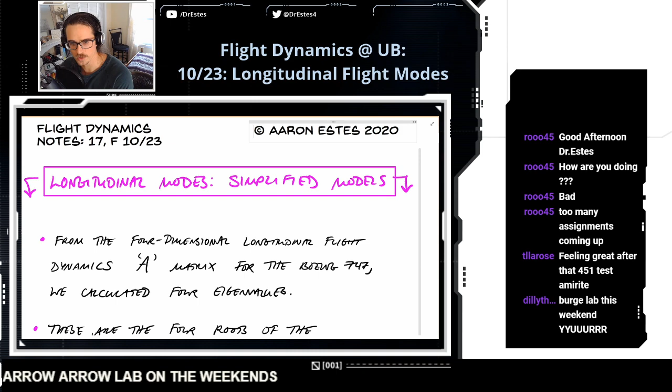Feeling great after that 451 test, am I right? Burge Lab this weekend. You guys do the Aero Lab on the weekends? What are you doing in the Aero Lab? Got some wind tunnel stuff going on, or the 339 lab is huge. Silent H, right?

Burge ruined the weekend. He pulled a weather hold with that Aero Lab. What does it mean to pull a weather hold? Everyone procrastinated.

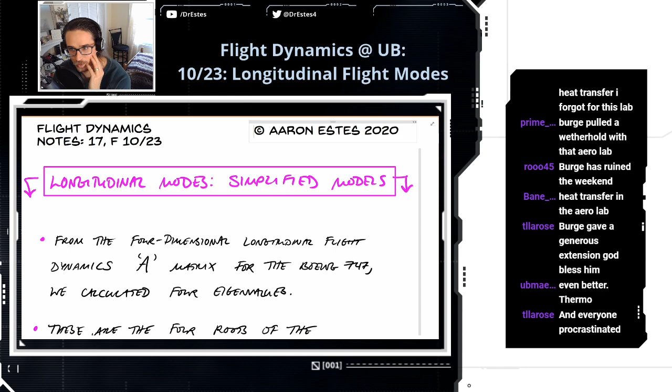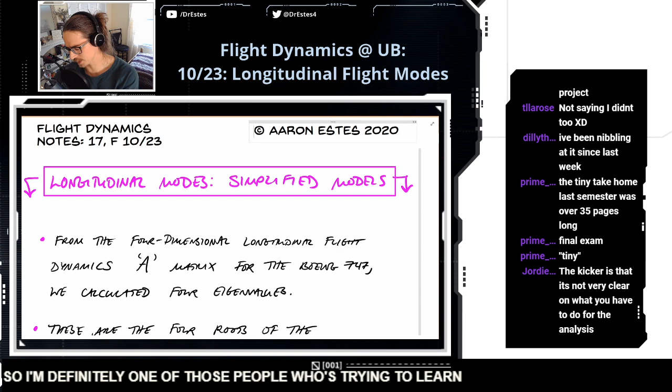He did not. This thing has been due for almost a month. Yeah, you know, that's the thing. Procrastination, I feel like some people are naturally good at taking care of things as they come up. I have to work very hard not to procrastinate, so I'm definitely one of those people trying to learn not to procrastinate. But I feel you guys. Man, time management is tough, I feel like it's a lifelong thing.

COVID sync and non-sync work has been illuminating, immense value. Wait, what do you mean by that? Expand—are you saying that synchronous stuff has been more beneficial for you? Mega Mike, it's a hard skill to hone in on. Yeah, time management, that's no small thing.

The option to be non-sync forces you to plan. Oh, I see. Like if it's non-synchronous, there's less structure and you have to make your own structure.

I miss just walking around campus going to class. I miss that too. I miss seeing you guys in the hallway or in the classroom or whatever. I miss being on campus, seeing people.

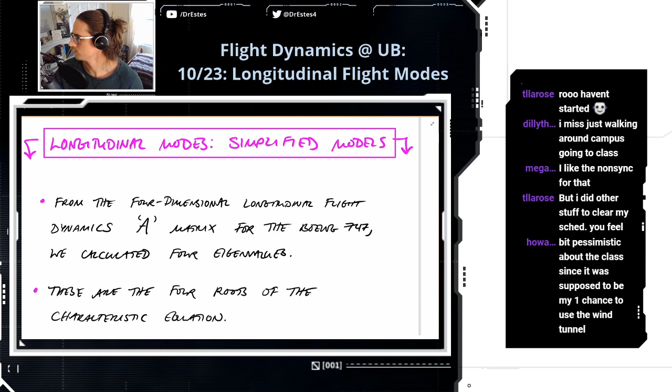It was supposed to be your one chance to use the wind tunnel. Oh, you're not using the wind tunnel for the Aero Lab? Thanks, COVID. Oh, that's a pain. Yeah, you don't get to do the lab in person, so you watch. Yeah. Oh man, I know.

I get the feeling that the season is changing without me noticing since I'm inside most of the time. Yeah, I try to get outside a little bit every day. It makes a big difference for me to just walk, see some leaves and stuff. Today feels like summer. It kind of does. It's bright outside.

All the classes are online in the spring. I know. Yeah, it's kind of a bummer.

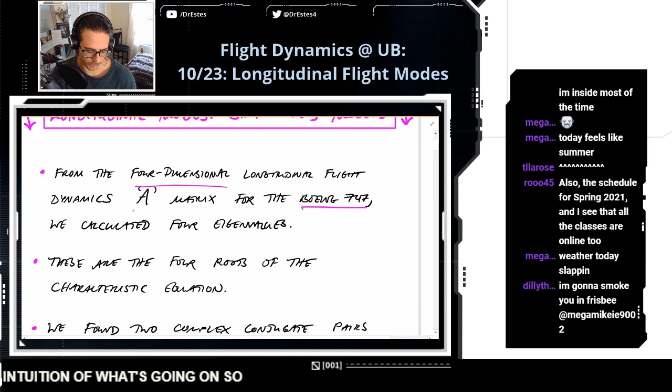We built a state space model, and part of a state space model is the A matrix. If you calculate the eigenvalues, we know from system dynamics that those eigenvalues are the roots of the characteristic equation for the system. The characteristic equation tells you a lot about the system dynamics: stability, whether there are oscillations, how quick the system is, its settling time, and also overshoot, rise time, and other transient characteristics.

So the type of roots we found for the Boeing—well, number one, they were stable. Thank God, right? How do you know if roots are stable? You look at the real part and just make sure that the real part is negative.

So these were the Boeing 747 roots—these two pairs—and these have special designations. This one is the phugoid mode, and this one is the short period mode.

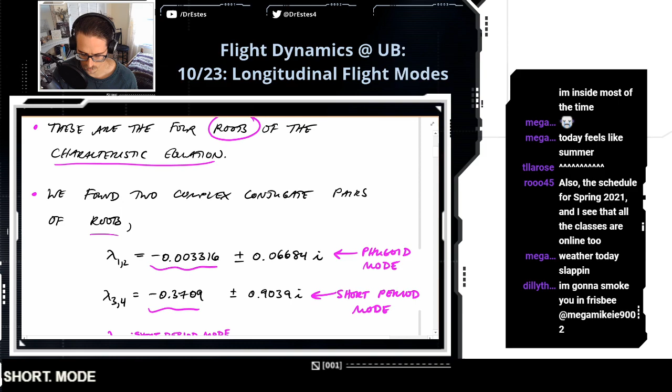And we're going to talk a little bit about physically what these modes look like today. I drew some fancy pictures, so we'll get to those.

If you draw these roots in the complex plane, you'll see the short period mode is over here to the left. We pointed out that means faster settling time. If you excite the short period mode dynamics, they decay very quickly. For the Boeing 747, it's on the order of 10 seconds.

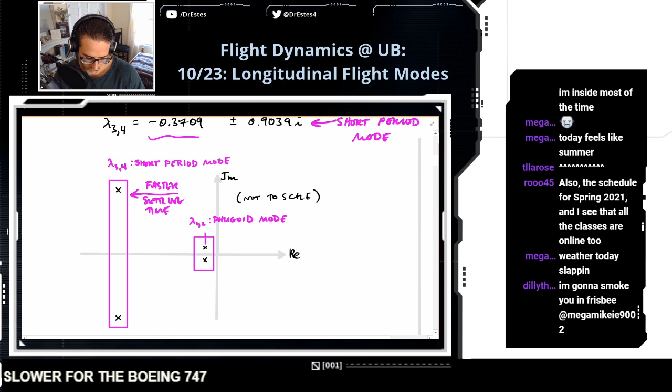These phugoid modes are slower. For the Boeing 747, this is not as far to the left. It means these dynamics are slower to decay. It takes around 1,200 seconds.

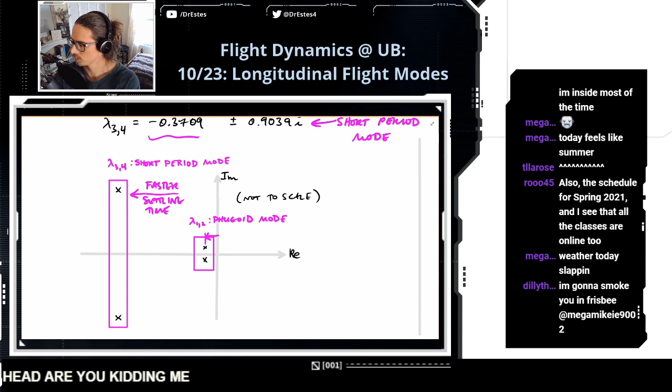What is that in minutes? I can't do that in my head. Are you kidding me? 20 minutes? 1,200 divided by 60? It takes 20 minutes. If you hit a gust of wind or something and there's no corrective action from the controller, 20 minutes for the phugoid mode to decay.

Now, the height of, or the distance from the roots to the real axis, which I'm just calling like a height in the complex plane, this is related to the damped natural frequency, omega D. And that tells you the period of oscillation. So the larger the distance from the real axis, the higher the frequency is.

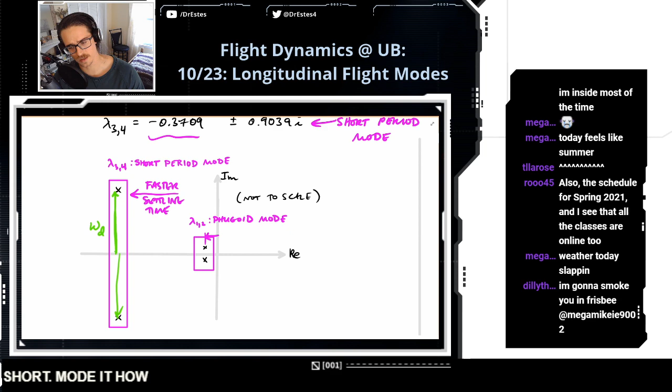So the short period mode has an oscillation period of like 7 or 8 seconds to complete a cycle. The phugoid mode, I think it takes about close to 100 seconds to complete a cycle, because it's much closer to that real axis.

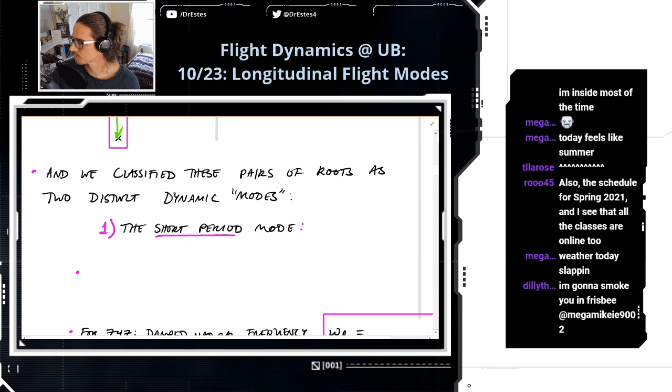Let's break this down a little bit more. So like I said, relatively short period of oscillation, with a fast settling time.

Let's just fill in some of these numbers here. So for the short period, for the 747, the damped natural frequency is 0.9 radians per second. To get the period of oscillation, you take 2 pi, divide it by that damped natural frequency, and we get about 7 seconds. Then the settling time, the time it takes for these dynamics to decay, we have an approximation for that, which is 4 divided by the product of the damping ratio and the natural frequency, and that's about 10 seconds.

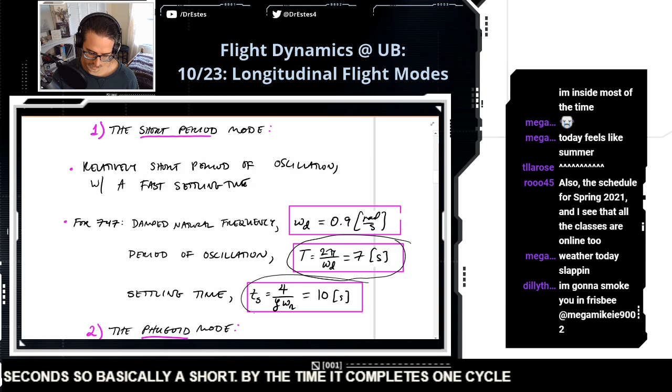So basically for a short period, by the time it completes one cycle, the dynamics have already decayed, so you won't expect this to endure more than one cycle.

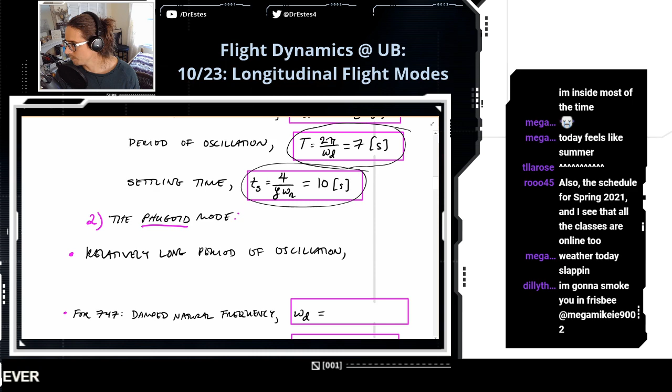Let's talk about the phugoid mode, and then we're going to draw some pictures. All right, the phugoid mode: relatively long period of oscillation. Everything's relative, man. With a long settling time.

Let's compare these for the Boeing 747. So the damped natural frequency is 0.07 radians per second approximately. Then to get the period of oscillation, the time it takes to complete one cycle, 2 pi divided by omega D, and it's like 94 seconds. The settling time, we'll use that same formula from above, it's about 1206 seconds.

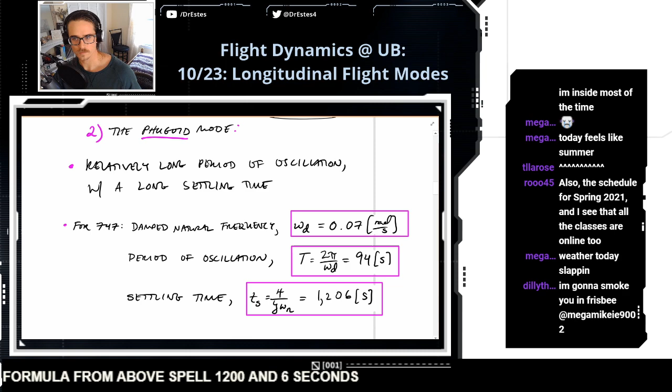All right, we've been talking about the period of oscillation, how long it takes to decay, but what does this actually look like? What is zeta again? Okay, so zeta is called the damping ratio.

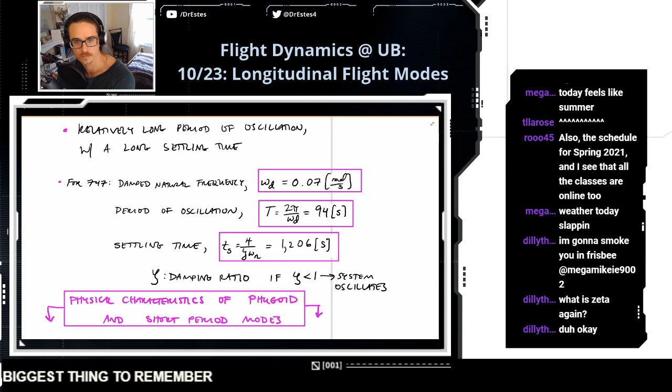Called the damping ratio. Now, something to remember: if zeta is less than 1, the system oscillates. I think that's the biggest thing to remember. You're going to have complex conjugate roots. So we already know, because these roots were both complex conjugate, the damping ratio should be less than 1.

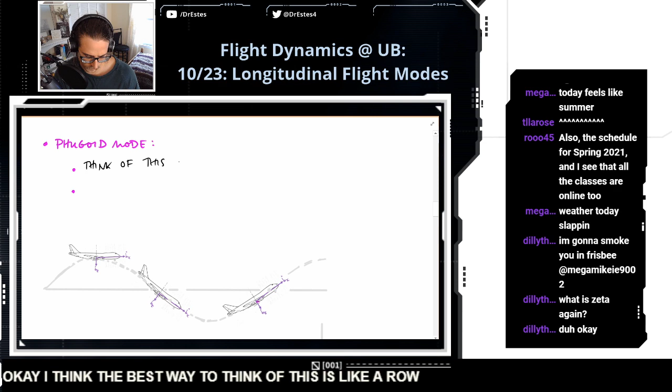I think the best way to think of this is like a roller coaster, because there's an exchange of kinetic and potential energy, just like there would be on a roller coaster that's following a sinusoidal path like this. So the aircraft follows a slowly decaying sinusoid - in the case of the 747, it takes 1200 seconds, 20 minutes, for this sinusoid to decay.

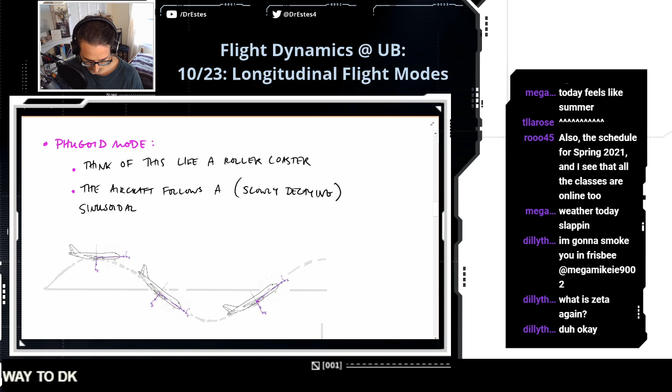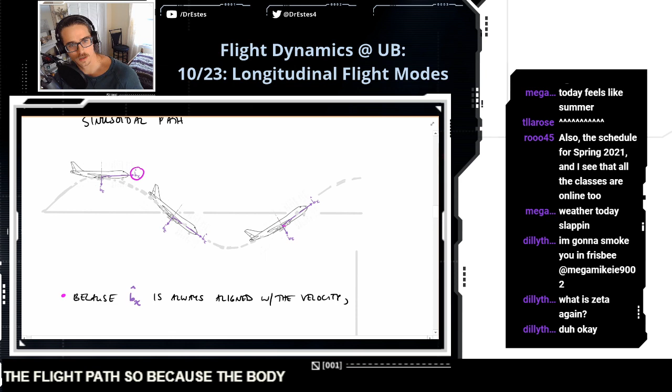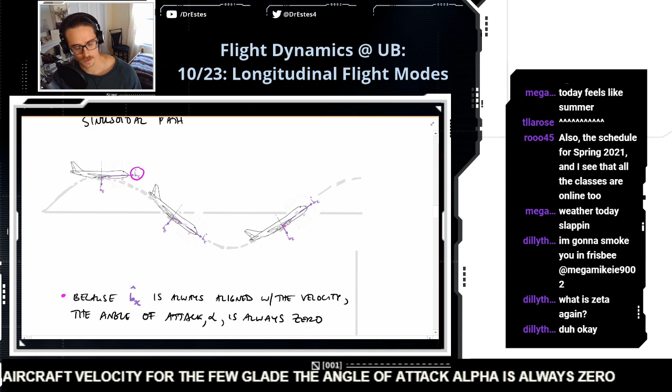Now if you look here, the longitudinal axis of the aircraft is always tangential to the flight path. Because the body X basis vector is always aligned with the aircraft velocity, for the phugoid, the angle of attack alpha is always 0. The relative wind generated by our motion is always directed along the longitudinal direction.

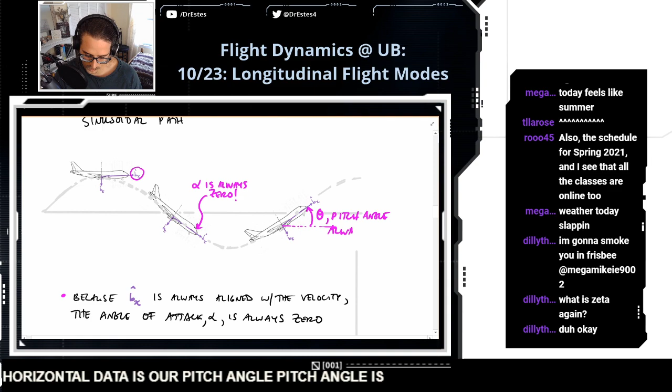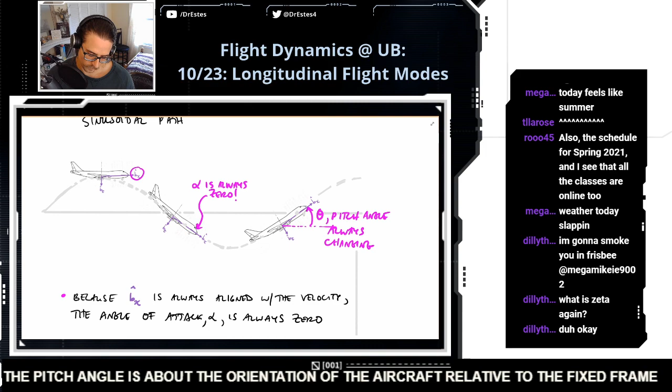The pitch angle is the angle of the nose relative to the horizontal. Theta is our pitch angle, and it's always changing. Remember, the pitch angle and the angle of attack mean different things. The angle of attack tells the angle of the relative wind, so it has to do with velocity. But the pitch angle is about the orientation of the aircraft relative to the fixed frame. That's why this pitch angle right here is non-zero.

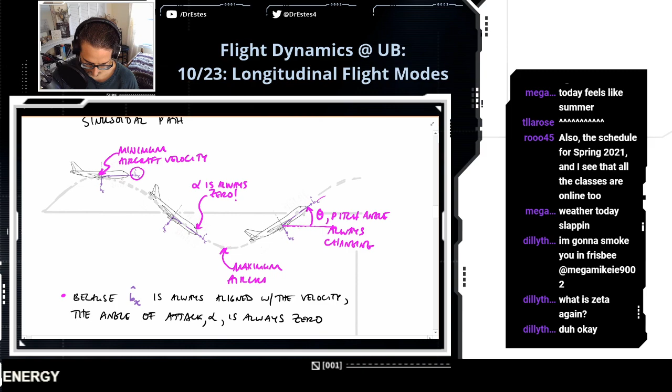Okay, the cool roller coaster effect of the phugoid is at the top. You're going to have minimum aircraft velocity. It's definitely non-zero, we're moving like 700 feet per second, but it's going to deviate slightly from that nominal flight speed. So maybe at the top here it's like 650 feet per second. Then it gains speed as it goes down, as it gains kinetic energy, and then it loses speed as it approaches that crest again, going back to a minimum velocity. I like this because it's a pretty rich way of looking at this mode - you can kind of visualize what's going on. It's like a roller coaster.

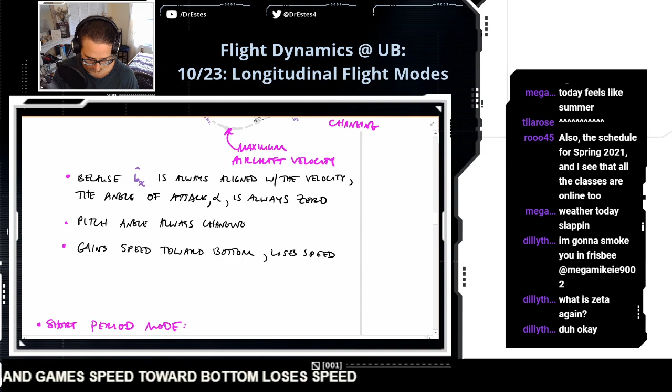So pitch angle is changing, and it gains speed toward the bottom, loses speed toward the top. Let's just say it this way: as you're ascending, you're going to lose some speed. Gain speed descending, lose speed ascending.

And the period is the time it takes to get back to the same place within the cycle. So this distance from here to here, or the length of time, that's the period, which is basically like 100 seconds. So it takes a little over a minute for a Boeing to complete this cycle.

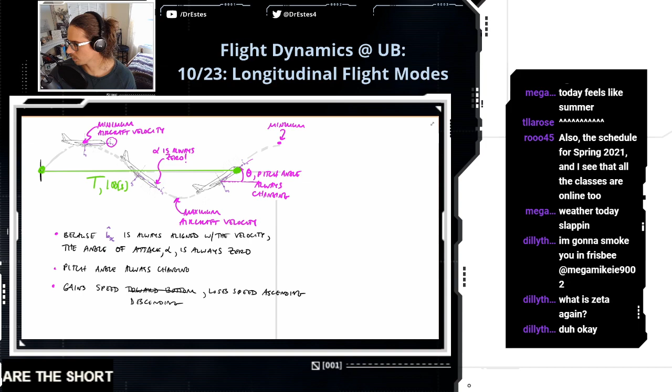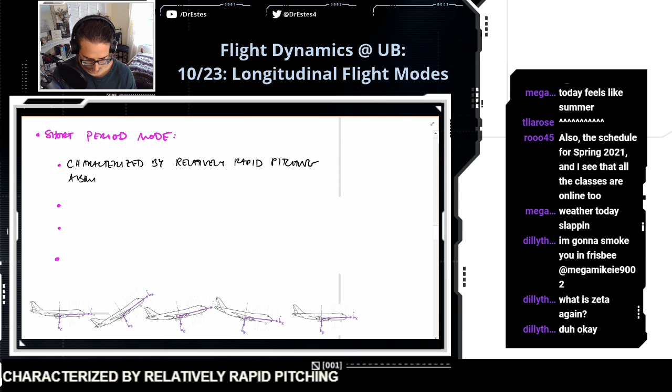All right, let's talk about the short period mode. This one's different. Let's get this picture in here. Okay, so this is characterized by relatively rapid pitching about the CG. That means going nose up, nose down - that's a pitching motion.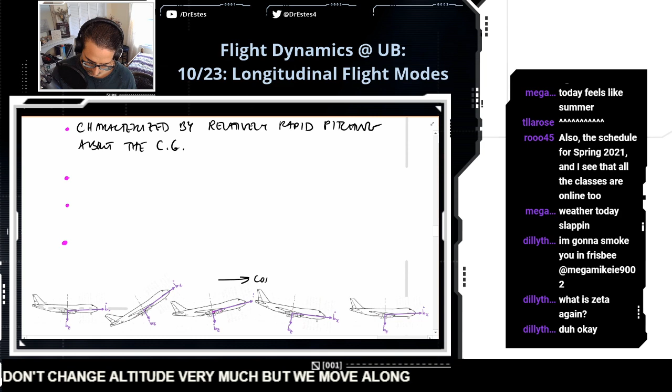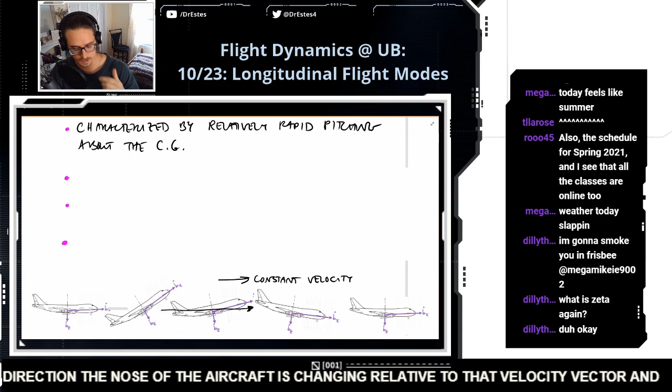So you see the nose - let's say we're flying straight and there's a gust of wind that tips up the nose in an exaggerated fashion. Well, that'll excite this short period mode where we don't change altitude very much, but we move along at constant velocity, and the nose of the aircraft is just pitching up and down as we move in that direction. Because this constant velocity is just along this straight line direction, the nose of the aircraft is changing relative to that velocity vector. And so if the velocity is always going that way, we do have an angle of attack.

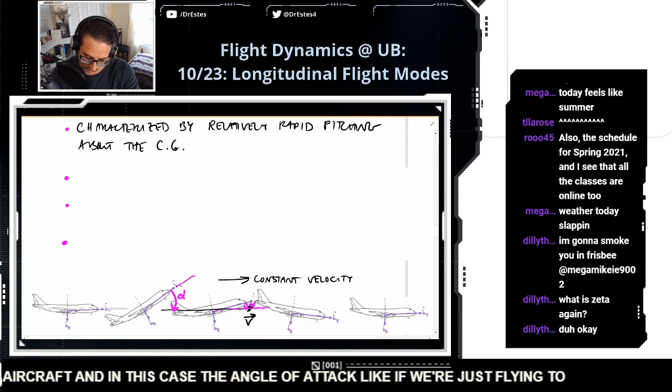That's changing, because it's the angle between the relative velocity and the nose of the aircraft. And in this case, if we're just flying totally horizontally, the angle of attack would be equal to the pitch angle, because it just happens that the velocity vector is aligned with a fixed axis basis vector as well.

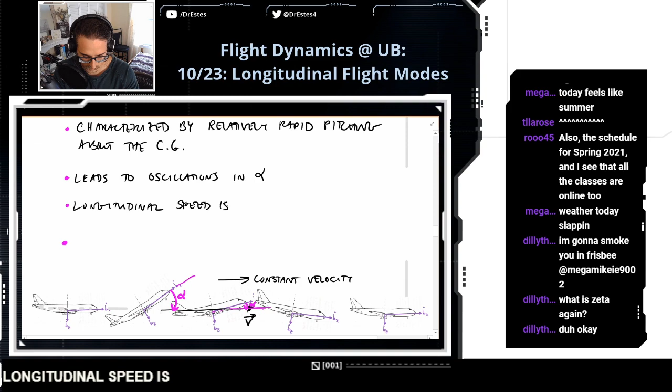So this leads to oscillations in alpha, the angle of attack. Unlike the phugoid, longitudinal speed is constant. The phugoid, it's kind of changing - it gets slower at the top, faster at the bottom. And another important feature is that the motion quickly damps out.

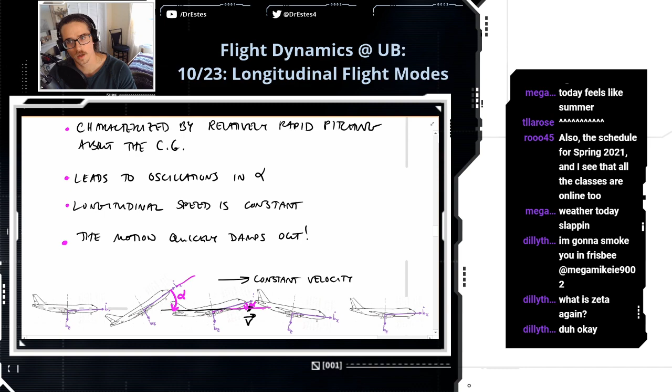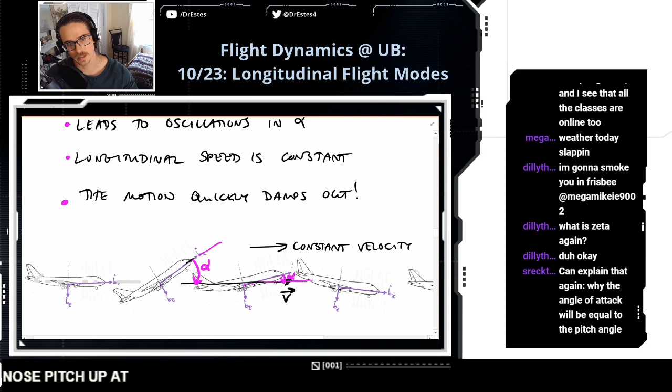Remember, the settling time is around 10 seconds, and the period of oscillation is around 7 seconds. So one cycle of motion would be like the nose pitches up, and then to complete a cycle the nose pitches up once again. But look at this - the motion is damping out, and the angle of attack is becoming less and less. So all of that motion damps out after about one cycle. The nose might pitch up, and then you won't really see much after that again. It's not like it's going to keep going back and forth and back and forth.

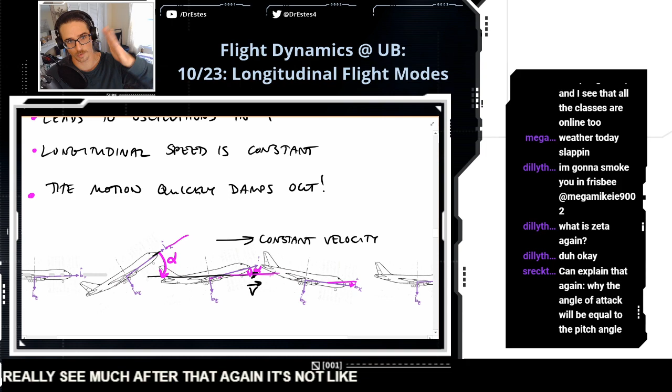Okay, so that's kind of what they look like. So now we can visualize.

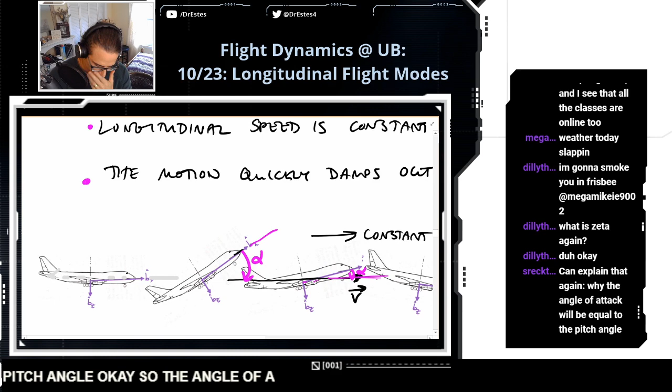Can you explain that again, why the angle of attack will be equal to the pitch angle? Okay, so the angle of attack is the angle between the nose of the aircraft - this bx basis vector - and the relative wind. So if my velocity is going just straight horizontally, then the relative wind is hitting the aircraft like this. So the angle between the nose and the relative wind, that's alpha, okay?

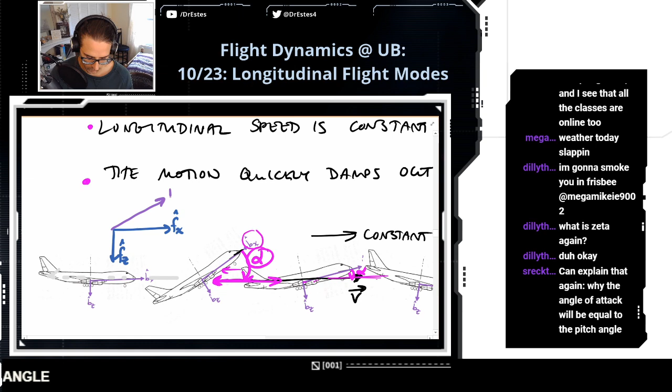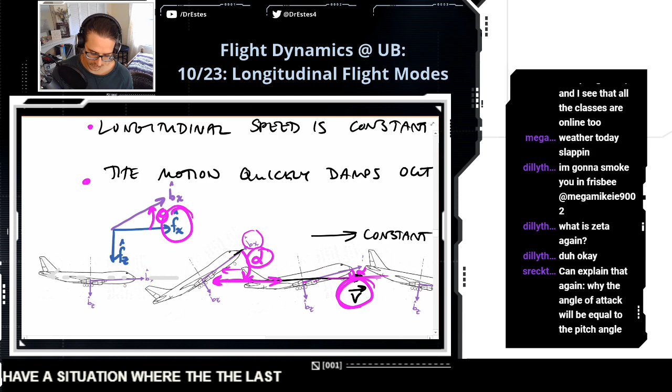Now, what is the pitch angle? It depends on the definition of the fixed frame, but usually we'll have fx horizontal, fz going down, and the pitch angle is the angle between the nose of the aircraft and that fixed frame basis vector. So if the velocity and this fixed basis vector are aligned, then the angle of attack and the pitch angle are the same.

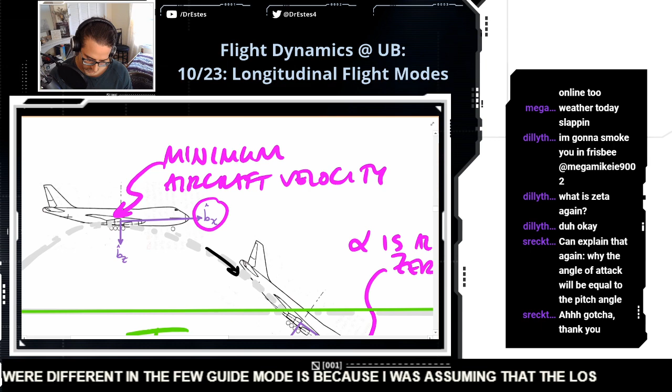The reason they were different in the phugoid mode is because I was assuming that the velocity is always changing to follow tangential to this path. So in this case, the angle of attack is 0, but the pitch angle, if we still assume that basis vector for the fixed frame is aligned like this, is different.

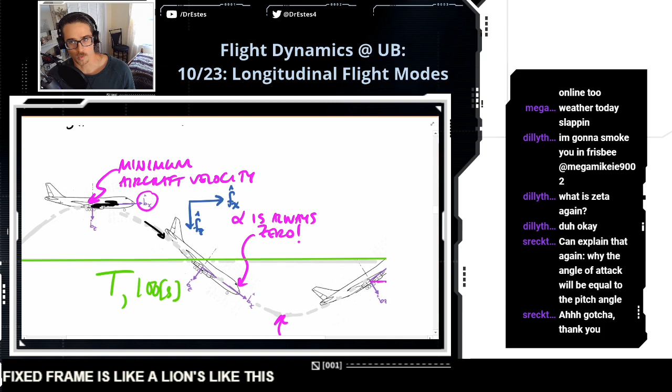You're welcome, my friend. Okay.

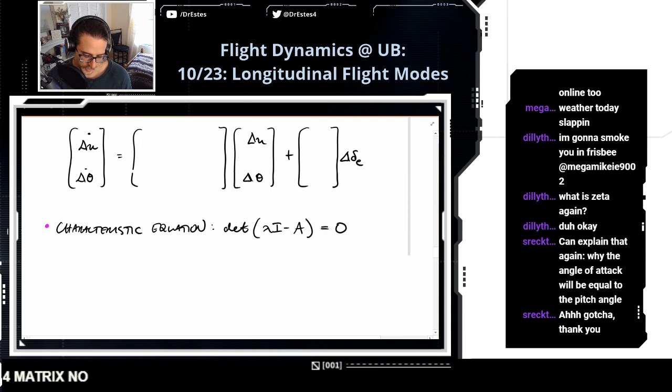All right, we're going to do some simplified models. The way we derived the settling time, the natural frequency, whatever, is we took the eigenvalues of the A matrix, and that was a 4x4 matrix. Now, it turns out you can make a second order model for the phugoid and the short period that captures those same dynamics pretty well, and it's easier to work with than a fourth order model. So I want to show you these things.

So for the phugoid mode, let's start with that. You can make a new set of dynamics. Now that we've visualized the phugoid mode, we know it's characterized by changes in speed - it's slowest at the top, fastest at the bottom. So the speed is changing and the pitch angle is changing. So you can make a truncated model that focuses in on these variables.

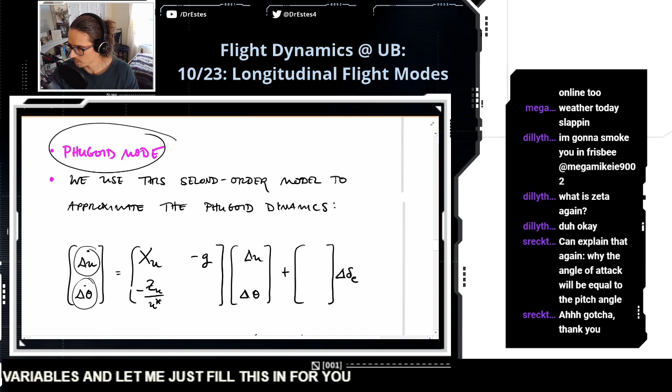Let me just fill this in for you. This is our new A matrix for the phugoid. It also has a B matrix, which we won't really use today - we're just going to focus on the A matrix. But for the sake of being complete, we'll put this in here.

So what I want to do is use this simplified model and see if it predicts the same behavior that we know a Boeing 747 should have. And spoiler, this does a pretty good job - this is why we use this simplified model. And we're going to calculate the characteristic equation by hand.

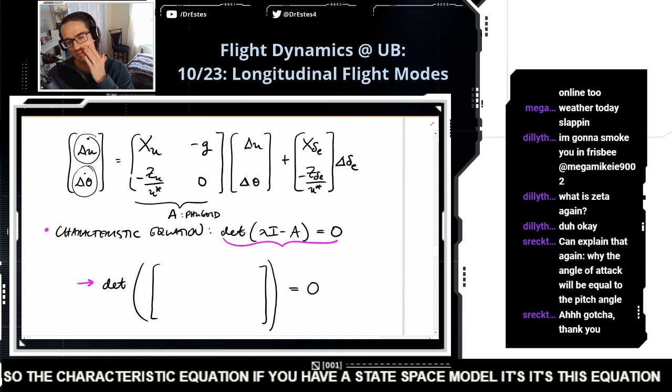So the characteristic equation, if you have a state space model, it's this equation: the determinant of lambda times an identity matrix minus your system matrix. So if I substitute this in, I'm going to have lambda minus xu, because I'm subtracting the A matrix. And this top right element, minus g, if I subtract it, it's positive g. This is going to be positive zu over my nominal velocity. And I'm just subtracting 0 here, so I'll leave lambda in the bottom right.

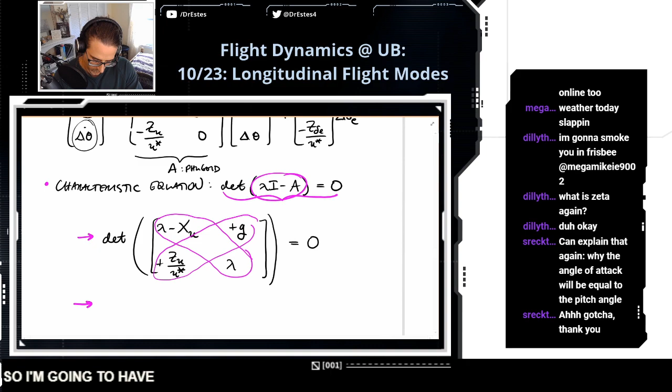So if I take the determinant of this matrix, which is really easy to do, that's our characteristic equation. Just a reminder, the determinant is the product of this diagonal, and then you subtract the product of the other diagonal. So I'm going to have lambda squared minus xu lambda, minus the product of that other diagonal, equals 0.

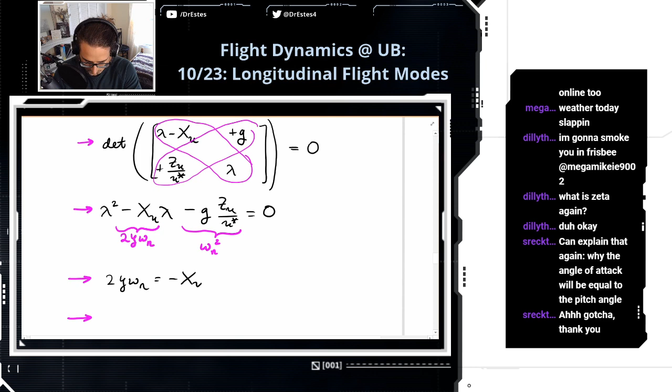Now this is in a nice second order form where you might remember this from a dynamic systems class. This coefficient is equal to 2 times the damping ratio times the natural frequency. This coefficient is equal to the natural frequency squared. So I have this relationship, and I have this relationship.

All right, so that's pretty painless. Now I want to use these equations to compare results to the full model here. All right, let's do this.

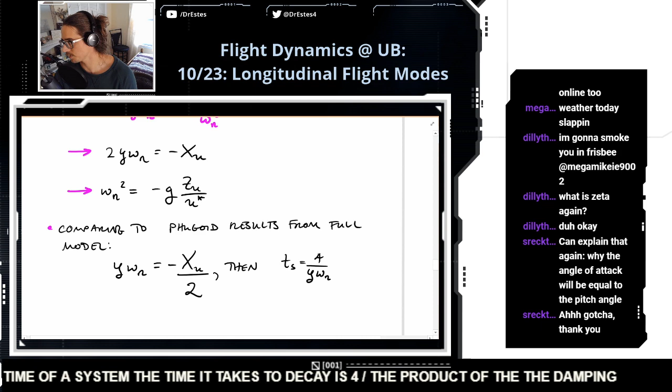So using this zeta omega n equation, that's equal to minus x sub u, the stability derivative, divided by 2 - I'm just getting that from the equation above. And then I have a formula for the settling time: the settling time of a system, the time it takes to decay, is 4 over the product of the damping ratio and the natural frequency. So if I substitute in this expression, I'm going to have the settling time is minus 8 over the xu stability derivative.

And this stability derivative, we got it from a table in a textbook for the Boeing 747. So fortunately, for a lot of well-known aircraft, you can just look up these stability derivatives in a table. So let's get the settling time. That stability derivative was minus 0.006868 seconds to the minus 1. And this is going to evaluate to 1,165 seconds.

And this is compared to the 1,206 seconds that we estimated from the full model. So there's a little bit of error incurred there, but not too bad.

All right, let's continue here. So I have the natural frequency. If I use the expression up above, it's minus the gravitational acceleration times z sub u over my nominal velocity. So let's plug this stuff in.

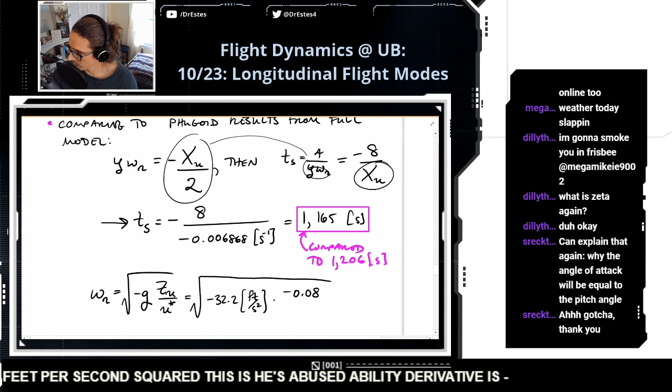So gravitational acceleration minus 32.2 feet per second squared. This z sub u stability derivative is minus 0.08993 seconds to the minus 1. And then our nominal velocity was 774 feet per second, which I believe was like Mach 0.8 at 40,000 feet. So pretty close to the speed of sound.

Okay, if you calculate all this out, this predicts a natural frequency of the phugoid mode of 0.06 radians per second.

Now, to get the period of oscillation, so that's what I want to compare to. I know it should be around 100 seconds or so. I have to take 2 pi over the damped natural frequency, which is different than the natural frequency. It's not that much different. The relationship is the damped natural frequency is the natural frequency times the square root of 1 minus the damping ratio squared.

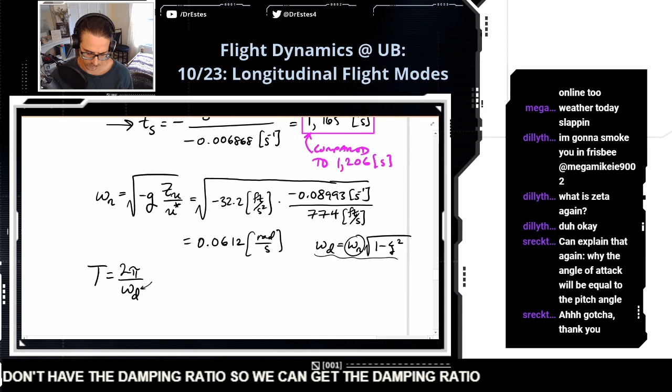So I need to calculate this so that I can substitute it in there. So I have the natural frequency, but I don't have the damping ratio. So we can get the damping ratio though. If we look up above, well, I know it would be minus x sub u over 2 omega n. And now I have this and I have this, so it's no problemo whatsoever.

0.0561. Now, if I substitute that into the damped natural frequency, I get 0.0611 radians per second, which, I mean, it's a negligible difference between the natural frequency.

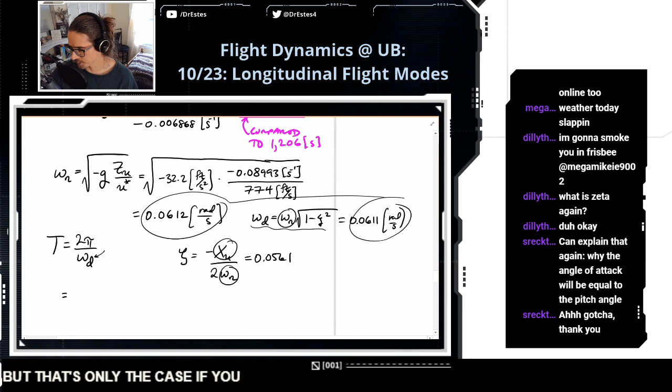But that's only the case if you have a small damping ratio. Okay, so now we can get the period of oscillation, and it's 102.83 seconds. And this is compared to the 94 seconds that we predicted before. So it's a little bit off.

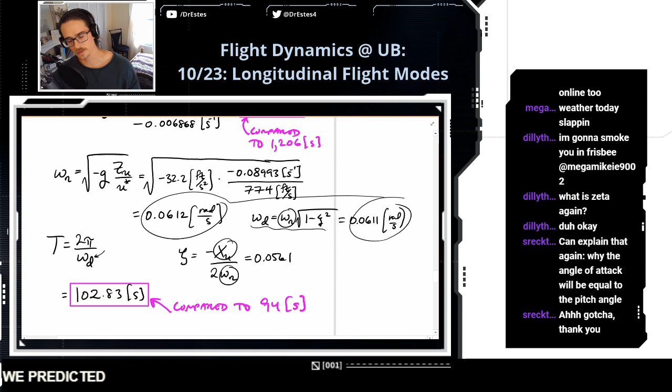Okay, so a question you might ask yourself is, okay great, this simplified model gives relatively the same answer, there's a little bit of error. But what's really the advantage of using this simplified model? Like, is it a big deal to go from a fourth order model to a second order model? Like, can we not handle that?

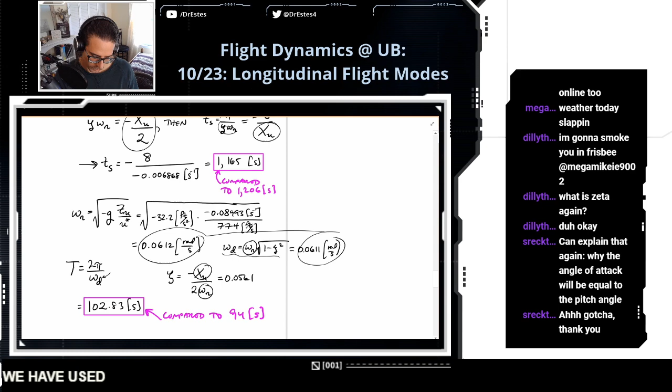I think the important reason is that, using this simplified model, we have analytical expressions for natural frequency, for damping ratio, and it's connected back to physical quantities like the stability derivatives and the airspeed. So when we calculated the numbers before, we would not have had such a tidy expression for natural frequency and so on.

So using these equations, you could say, all right, I want to adjust the period of oscillation of my phugoid mode for whatever reason. Like maybe the settling time takes way too long, and I want to bring this down to like 900 seconds. Well, using this formula, you could say, okay, the settling time is basically related to this stability derivative, x sub u. And if I want to decrease my settling time, well, I have to make x sub u bigger.

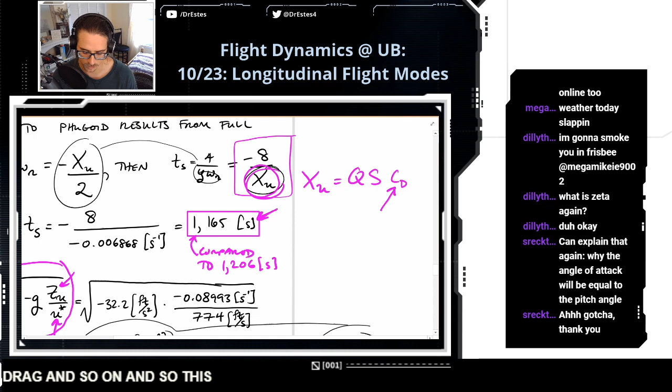And in a previous lecture, we calculated another expression for x sub u. I can't remember it off the top of my head, but it was something like the dynamic pressure, planform area, and then it was related to the coefficient of drag and so on. And so this comes back to maybe I need to change the area of the wing in some way, or maybe I need to change my airfoil so that this coefficient of drag changes.

So what I'm trying to say is these simpler equations give you some kind of basic intuition of how do I actually need to play with the geometry of the aircraft to achieve some performance characteristic, like minimizing the settling time. So it's pretty cool.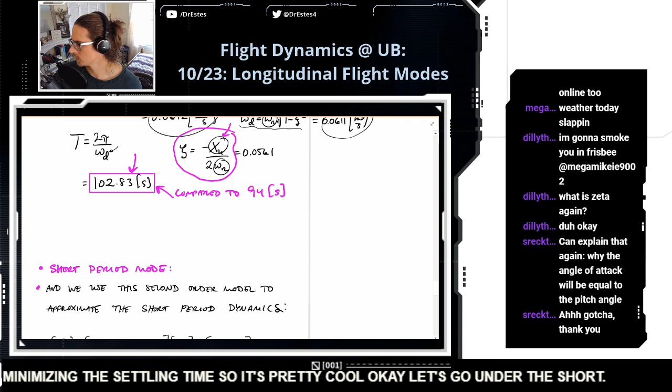Okay, let's go on to the short period mode. We'll do this approximation, and I think we're going to wrap up right around 350. We're doing good on time today.

Okay, so this is the second order model for the short period mode. This one, notice the parameters over here.

Number one, we got the pitch rate. So Q is your pitch rate. And we know like this mode, it's kind of sending the nose up and down, so it's important that the pitch rate is in here.

This is the speed, the velocity, and it's the time derivative of the velocity component relative to the BZ vector going out the bottom of the aircraft. But think of this as related to the angle of attack.

So it's basically describing, because we know that for this maneuver our speed is held constant, the angle of attack is the inverse tangent of delta W over U. So from this, we could calculate the angle of attack.

Let's fill this in. So I got Z sub W in the top left element. I got the airspeed in the top right. And then I have these stability derivatives for the pitch rate. And I'm running out of room for this element.

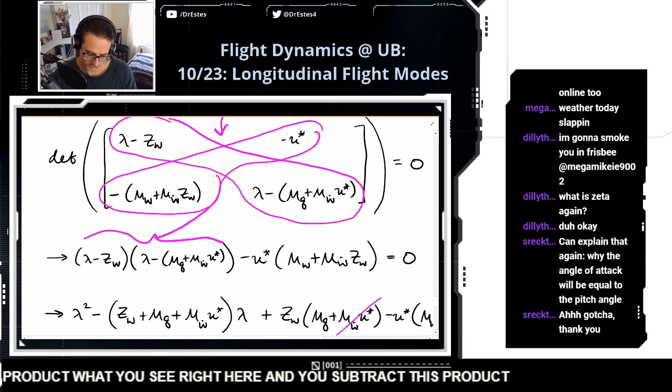So that's what we have right here. And then we just simplify it a little bit. For one thing, you'll notice that these two terms are going to cancel out, considering these products on the outside as well. And you end up with this, where this coefficient in front of lambda, that's 2 times the damping ratio times the natural frequency. This is the natural frequency squared.

And so what I want to do, I want to use these expressions and let's see how some of the numbers compare to the full model. So let's start with the natural frequency this time. Natural frequency squared, it's going to be Z sub W, and I have a number for that.

Minus 0.313 seconds to the minus 1, multiplied with M sub Q, minus 0.339 seconds to the minus 1. And then I have minus M sub W, minus 0.0011 foot to the minus 1 times second to the minus 1. And then that's multiplied with the nominal airspeed, 774 feet per second, which is Mach 0.8 at 40,000 feet, I believe.

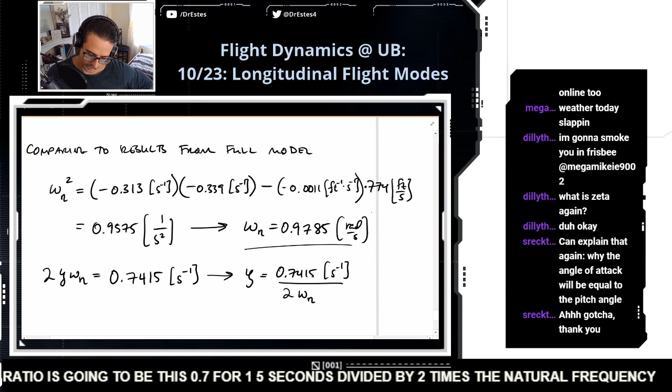So now I can get the damping ratio, because I know that the damping ratio is going to be this 0.7415 seconds to the minus 1 divided by 2 times the natural frequency. And I have the natural frequency right up here, so I can sub that in, and you're going to get a damping ratio of 0.3789.

Now this short period mode is much more damped than the phugoid. I think for the phugoid our damping ratio was like 0.05 or something. This is much more damping, which we expect.

So now that we have the natural frequency and damping ratio, we can get the settling time. It's 4 over your damping ratio times your natural frequency. So we have the natural frequency, we have the damping ratio. If you multiply this out, you get 10.8 seconds.

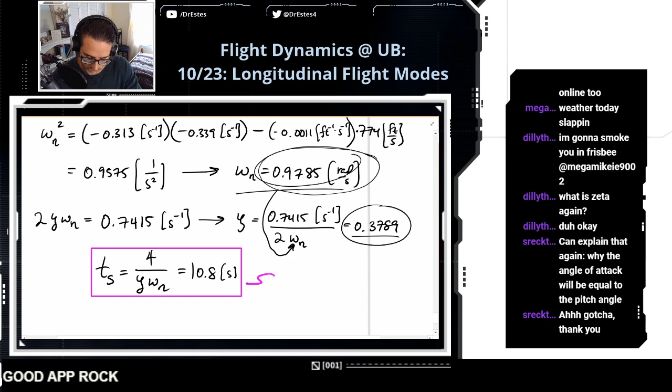And this is a very good approximation, because the settling time that we had before was 10.8 seconds.

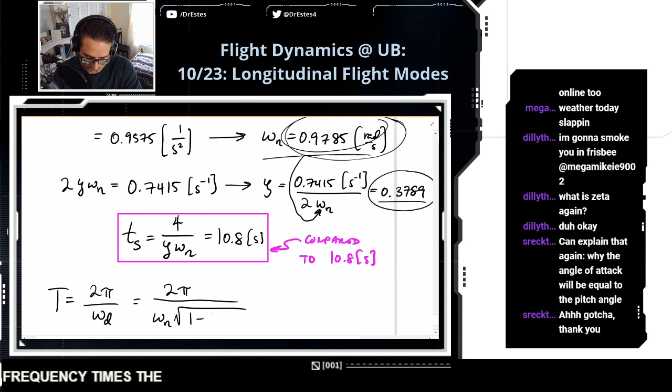Okay, let's figure out the settling time. I mean the period of oscillation, my mistake. So the period of oscillation is 2 pi over the damped natural frequency, which is 2 pi over your natural frequency times the square root of 1 minus your damping ratio squared, which is 2 pi over 0.9055 radians per second. This comes out to 6.9 seconds to complete one oscillation cycle of the short period mode.

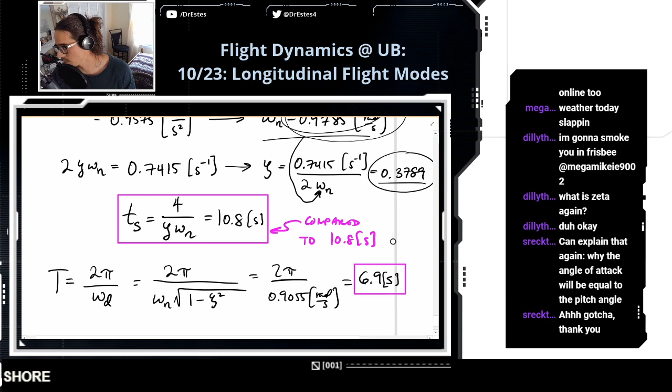And this is once again a very good approximation, because the number we got before with the full model was 6.95 seconds.

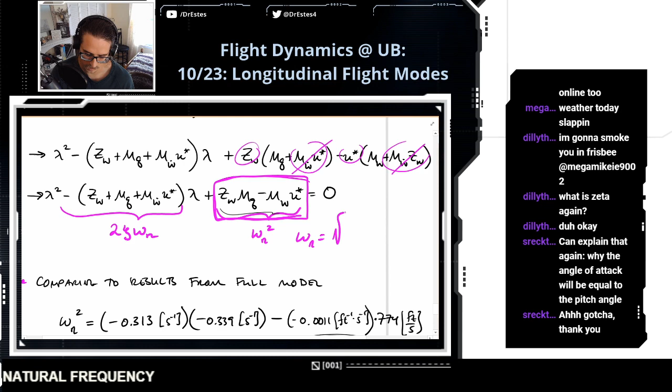So just to drive this home once again, you can see from the numbers these simplified models are decent for characterizing the basic dynamics of these two modes. So that's number one, they're a good approximation. Then on top of that, they have the advantage that they give us some simple expressions that relate something like — now I have the natural frequency, which is the square root of these

stability derivatives, which are related to physical parameters. So if I want to change my natural frequency, these formulas give me tools as a designer to go back and say, okay, do I need to change my wing area? Do I need to change my coefficient of drag, coefficient of lift, so on and so forth? So it gives you power as a designer to make some general decisions about changes you want to make to your aircraft.

So hopefully we can work in some examples like that in the near future, so you can see the true power, the unlimited power, as Palpatine would say.

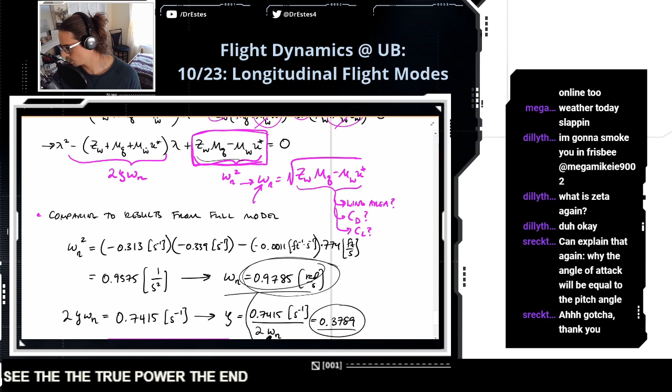Is there a reason why the short period mode has better approximations over the phugoid mode? Good question.

I don't have a clean answer for that. Now, the way I can tell you this: the way that we arrive at these models in the first place is you take the fourth order model that we started with, you calculate the eigenvectors of that fourth order matrix. What those eigenvectors tell you is the relative participation of different perturbation states in those dynamics.

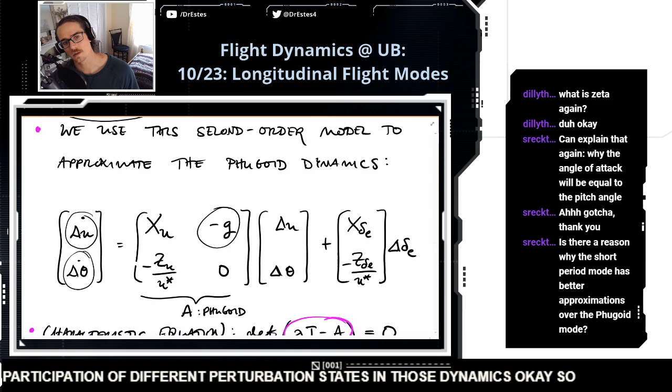So even though I say that, let's take the phugoid for example, that the angle of attack is always 0 or something like that — that's not entirely true. The angle of attack might be changing a little bit. It's just that the participation of the angle of attack in these dynamics is so small compared to the others that we neglect it. So that's kind of the price we pay with the simplification.

So to answer your question, what I think is, when they did that eigenvector analysis and looked at how each perturbation state participates in each mode, an assumption like this — just throwing out that angle of attack — might have had a larger effect on this mode than some of the assumptions for the short period. That's the best I got. But I also expect that from aircraft to aircraft, some approximations might be better than others.

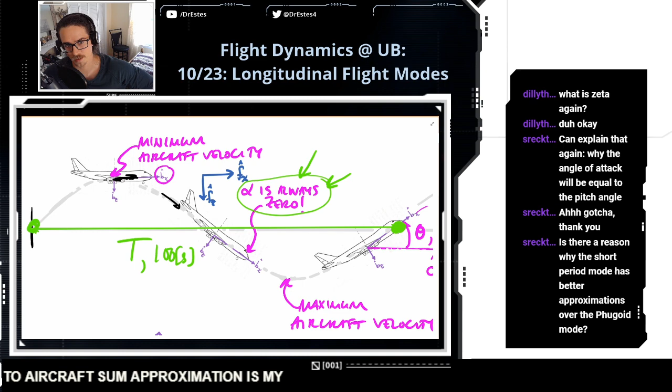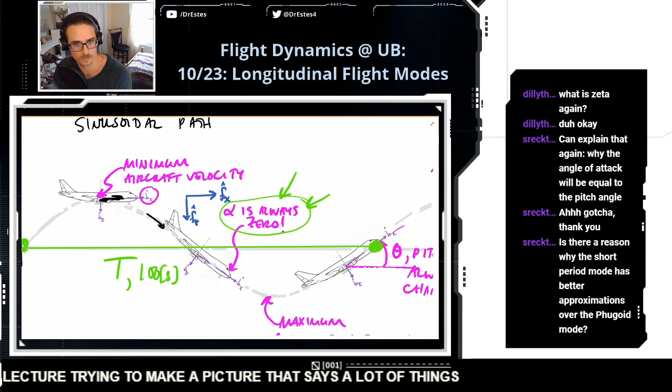I had fun making this picture though. That's one of my favorite things of preparing a lecture, trying to make a picture that says a lot of things. There's 4 or 5 details you can get out of a figure like that.

So that's what I wanted to cover today. We're sliding in right around 350, and we did it. We didn't go over time. We just knocked it out of the park.

So you guys are free to go play frisbee. Oh shoot, the sun is not as shiny as it was earlier. It's gotten a little overcast.